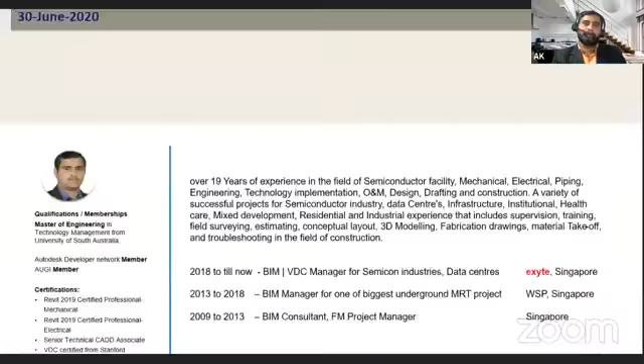As Mr. Deepak mentioned, this is about me. In total, about 20 years of experience in different industries, more than 10 to 15 years in technology development and implementation, developing engineers, developing people, and mentoring. Currently, I'm working as a digitalization contributor plus BIM, VDC, and integrated digital delivery manager for Exyte Singapore.

I will straight away jump into the topic. Today I would like to cover topics like introduction to semiconductors, introduction to fab facility and what a clean room is, and introduction to utilities and base services. I'm dividing this fab facility into two areas: one is base services, another is called hookup services. Then how the wafer is manufactured, then chip manufacturing, then we talk about high-tech fab and the technologies used in it. Finally, we will have a Q&A session. This is the overall list of topics we'll cover today.

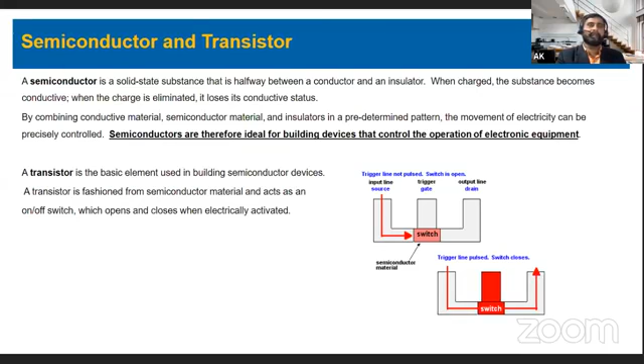In 1904, the two-electrode vacuum tube is invented. How big was this two-electrode vacuum tube? Actually, John Ambrose Fleming used the Edison effect to invent that two-electrode vacuum tube rectifier. It played a major role later in electrical design.

Here's an interesting aspect. The world's first general purpose computer, ENIAC, was announced in 1946. There's some interesting history about this. This computer weighed 30 tons, occupied a 160 square meter room, and used more than around 18,000 vacuum tubes. But these vacuum tubes always had problems; every 2 or 3 days, they had to be changed.

In contrast, today tens of millions of transistors fit smaller than the palm of our hand. We all carry mobile phones and a lot of electronic devices. Because of the IC's introduction, a lot of evolution happened in the semiconductor field. This picture here is that ENIAC computer, just for an introduction.

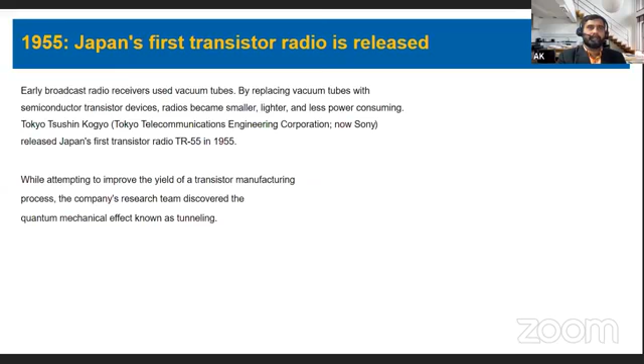I just ran through that history. The Kilby patent refers to the patent of the basic concept of the integrated circuit. It was first developed by TI, Texas Instruments, in 1959. I can put more history on that, but this is just an introduction about how semiconductors started and evolved to now.

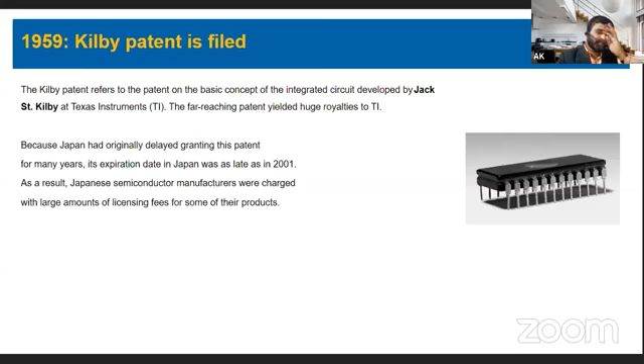So, Moore's Law - I'm putting this here. This is from the person who later became a co-founder of Intel. He predicted that the integration rate of LSIs, which I explained earlier, would double every 18 months, implying it becomes 1,000-fold denser in 15 years. What he predicted came to reality, almost exactly what he predicted. So the number of transistors on the same chip would double approximately every 2 years, which is happening at the moment.

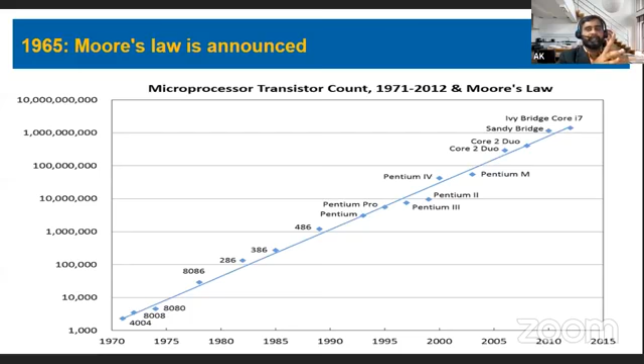Okay, I'll give an introduction to FAB. Today our main topic is about high-tech FAB. In the microelectronics industry, the semiconductor FAB is called something - FAB means something needs to be fabricated. Here, the FAB, commonly called a FAB - what is fabricated? IC is fabricated there, integrated circuits are manufactured. So that's why we call it a semicon FAB.

I put an image here in the next slide. You can see this is something like a typical FAB looks like. You can see the makeup air unit at the basement level, then the clean sub fab, and supply plenum. So this is something like a typical FAB looks like.

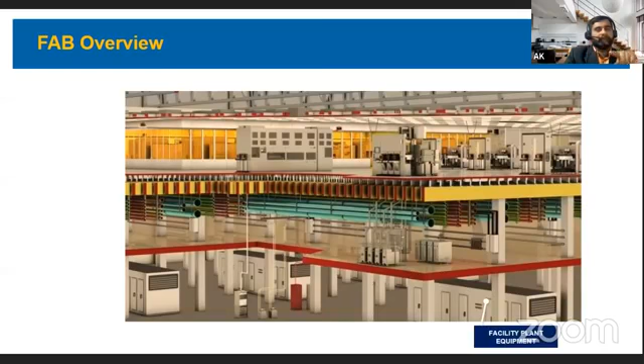Let me put another overview and explain how this FAB looks. At this basement level, or utility level - different projects call it different level names - you can see facility plant equipment will be placed there. Electrical distribution will be at that clean sub fab. Then this is the sub fab level 2.

Then tool supporting equipment - the tool supporting equipment will not be placed in the clean room, but main tools will be placed in clean rooms. I will later cover what clean room means and all that information.

Then this is called the hookup services. In the beginning of the presentation, I mentioned two things: one is called the base services, another one is hookup services. This is the hookup services - later I will cover that portion in detail.

Then this is called laterals. Laterals help connect utility services to the main tool - I will go into detail later on. Then the tools, the main tools - this is not just one tool, it may be hundreds of tools in that clean room area, helpful in preparing or manufacturing the IC chips. Then clean room and fab, you can see it here.

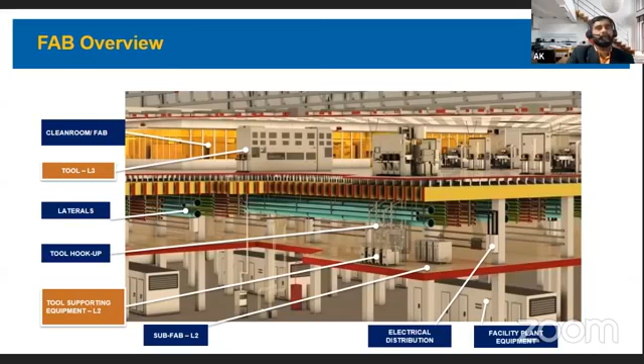Okay, just to give an idea here about the typical fab wafer fab facility, how it looks, and what are the things needed for this wafer fab facility.

For those processes, it needs to have a lot of gas storages, solvents, chemicals, DI waters. We also need to maintain the area and environment properly.

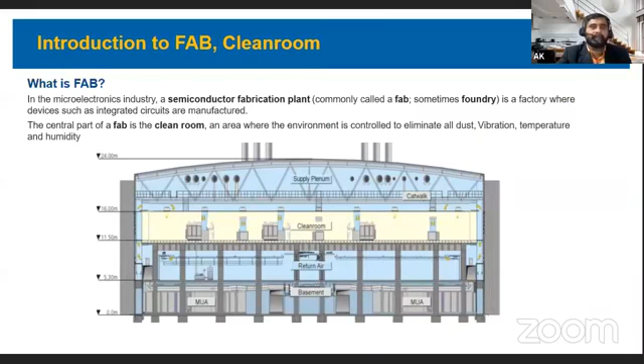In that previous slide, you see here something called clean room. This is the clean room area. This is the key element, the central part of the fab is a clean room. So we are going to discuss about that clean room here.

So what will that clean room do? The central part of a fab is a clean room, an area where the environment is actually controlled to eliminate all dust particles which are less than 25 microns in size. It has to be controlled. Dust is equal to 25 micron size, but some of those small speck particles may be lesser than that, 0.5 micron in size. So it has to be controlled.

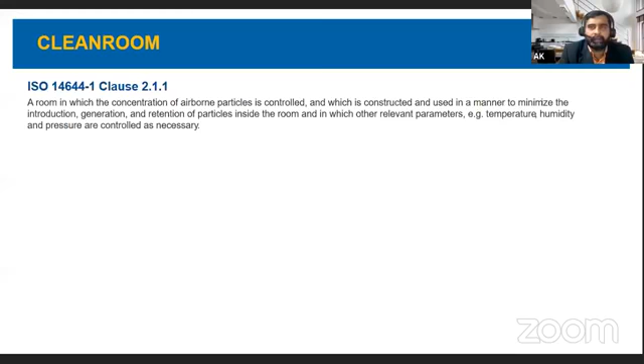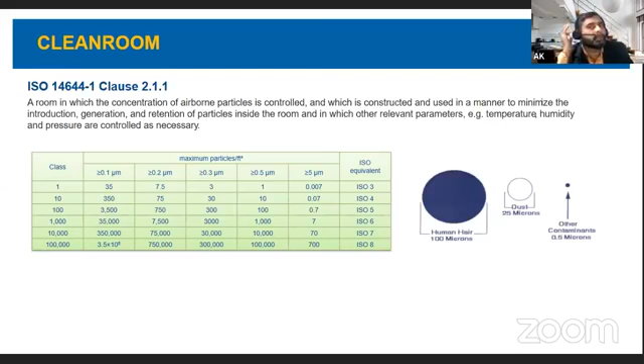Dust is equal to 25 microns. Other contaminants are 0.5 microns. I'll give a small explanation below. Semiconductor memory chips are manufactured in clean room environments because the circuitry is so small, even tiny bits of dust can damage it. You can see that scenario below.

In a class 1 clean room, there's no more than one particle of dust in a cubic foot of air. The 0.5 micron in size is that one dust particle only in that class 1 clean room. So some of the clients have clean rooms of class 1 and class 10. But for comparison, a clean modern hospital has about 10,000 dust particles per cubic foot. Now you can actually imagine how clean a clean room is.

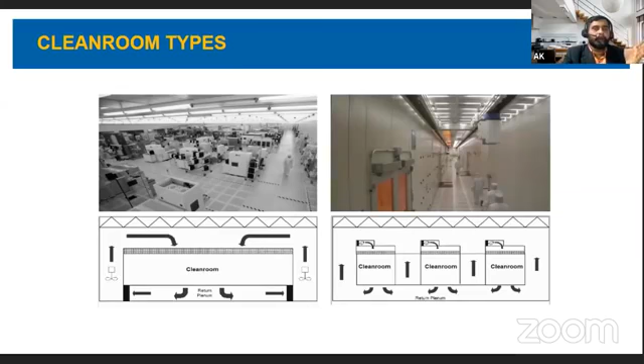There are different types of clean rooms. If you see on the left side, which is called ballroom layout, this is a continuous clean room - there's no partition or any bay in between. But if you refer to the next one, which is a bay chase layout, this clean room has a bay chase here. There are different types of clean rooms out there.

And go underneath this raised floor. You see that next one, which is called raised floor. I will cover what that raised floor is and all its functions in a next slide. Then one more item which is called waffle slab - if you see in that ballroom fab, this is called raised floor and waffle slab here.

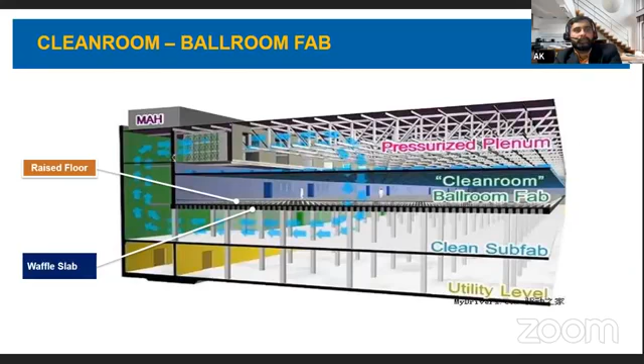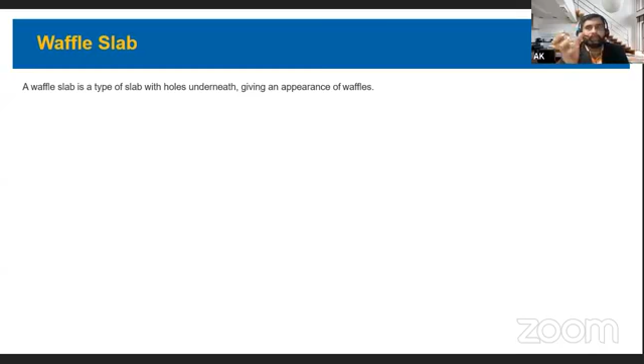What does that waffle slab mean? A waffle slab is a type of slab with holes underneath, giving an appearance of waffles. It is usually used in places where large space is required to avoid many columns. In case we need more columns to be in that place, we will use waffle slab to avoid that.

It actually avoids many columns interfering with the space. It has good vibration control capacity and load carrying capacity as well. You can see this is a typical waffle slab here.

Another item, going back to the previous slide, in that waffle slab there is a hole, circular hole. Some of the slabs may be square, some may be having a circular hole. If you see the next slide, there are call pop outs, just below that raised floor. These pop outs help route the services from the level below, sub fab, clean sub fab, to fab level. All the services will come through this one.

I will show you in the next slide so you will understand. This is the services coming through, and it will be locked, and there is a cover for that. So any services to reach the clean room area or clean room tool has to go through this pop out. There is no other way or external entry into that clean room, so it has to go through this pop out area.

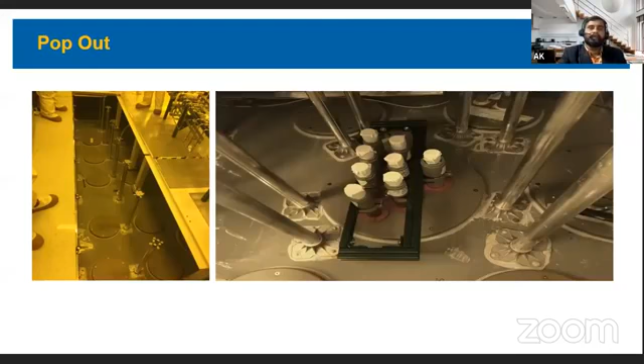Okay, next I will come back to this raised floor. What is that raised floor meaning? There is a space between the raised floor and the concrete slab on grade. Why do they need this raised floor? Because they have to control the environment with correct pressure, temperature, humidity, and all that information.

What they will do is use that return air duct. They will use that space between the raised floor and the floor slab as a return air duct, and also use that space for the routing of wiring, cable, and piping. Also, perforated panels provide a way to achieve flow conditions like airflow, particulate contamination, and vibrations. It actually helps them use that space for that purpose.

There are also different types of panels used for these raised floors, which may vary according to the application. Some of the materials are aluminum, fabricated steel, aluminum casting, wood core, gypsum, and cement. These are some of the raised floor materials they use here.

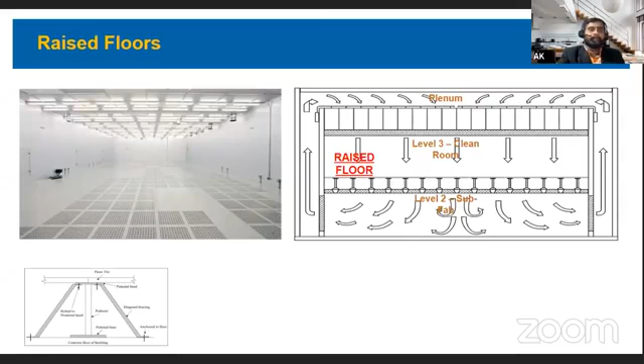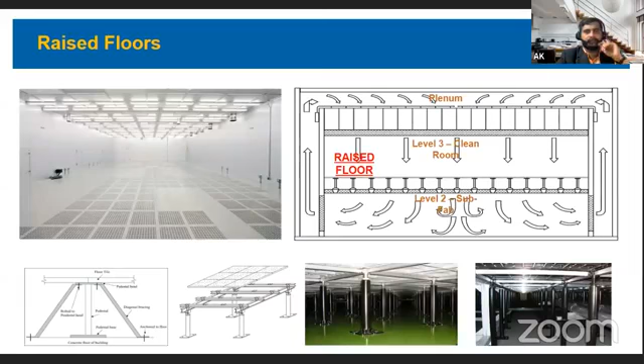If you see this pedestal here, this is the 3D view showing how this looks. These are the tiles, or we can call it the raised floor by partition. This is the view taken from the bottom. Underneath that raised floor you can see all the pedestals, and there are floors arranged here. So all the services will go underneath here. I will show this in the next slide to give you an idea.

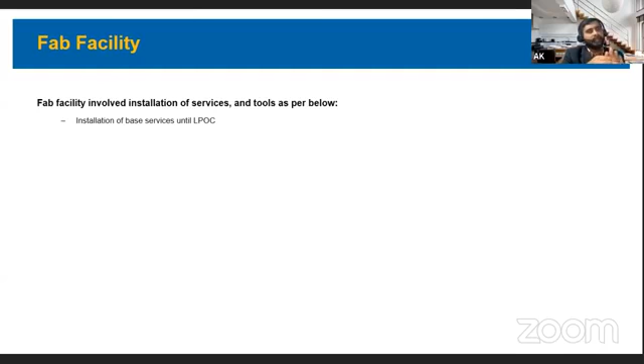Before that, I would like to tell you that in the fab I divide into 4 things here. In the fab facility, installation of base services until LPOC - that term may be different for you. LPOC means lateral point of connection; I will explain what that is. Then these are the services involved: archi and structure, which is actually the infrastructure, or envelope for the facility, archi and structure.

Architectural involves facades, doors, windows, and all those things. CSA is columns, beams, and all that stuff. HVAC is for ventilation and air conditioning systems, exhaust systems, bulk gases and chemicals. These are the things needed for tool operations. For the tools, it has to go through quite a number of processes, it has to go through - you can see it here.

And then the next one, if you refer here, is installation of hookup services between LPOC and TPOC. So these are the processes, and these are the tools it may have.

It has to install there, and I'll run through this tool installation in the clean room. It covers installation of tools and AMHS, which is the automated material handling system. I will go through all the videos in a while, running through a bit quicker, then chip production. So I'm focusing on all of these areas here, then come back to what I mentioned in the previous slide.

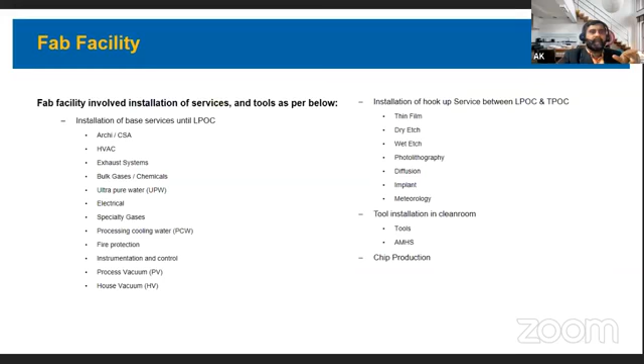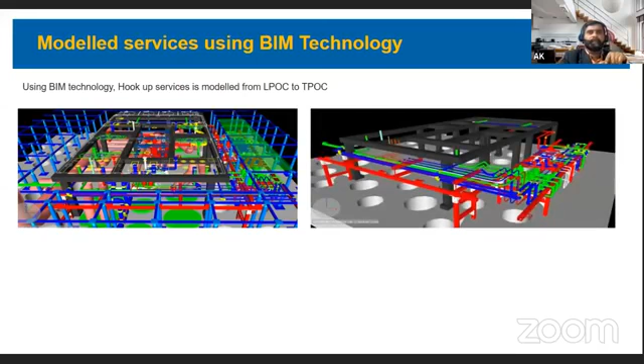All the services are connected from LPOC, then connect back here, which is above the waffle slab but inside the raised floor area. You can see here, this is the waffle slab, the pop out, the service comes up - you can see that information here. So this is called TPOC. In the previous slide I mentioned about LPOC, and this is TPOC, meaning it has to connect to the clean room tools.

Okay, then I talk about AMHS - what is this AMHS? Why do we need this automated material handling system? You can see here, wafers are moved between different tools and processes. There are quite a number of tools in the clean room, not only one tool - maybe wet etching, dry etching. There are quite a number of processes it has to go through. So what AMHS will do is move wafers between different tools and processes using the automated material handling system, called AMHS. Each wafer may be moved through 1000 processes - it may go through a different process, some maybe 800, 900 process, some 1000 process or more.

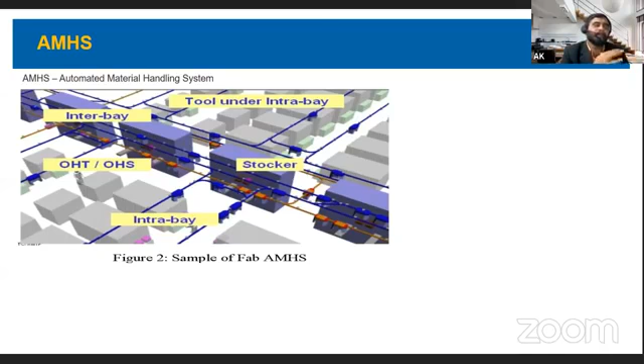It takes more than one month to make a memory chip, so it has to go through a lot of process. You can see here, this is the material handling system - it will run through this, go and reach the different parts. You can see here, this is the path, the AMHS, it will run here in this path.

Then the next one - I told you this thing is called FOUP, front opening unified pod. It is a specialized plastic enclosure designed to hold silicon wafers, because it needs to carry them in a controlled environment between different machines for processing various processes. So it will carry the wafers - it will travel around and go to that specific machine, drop down here, they will use this to do some process, and after that it will go up. It will actually go through different machines and different processes.

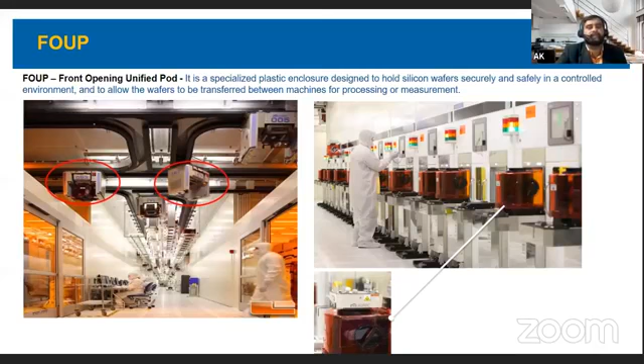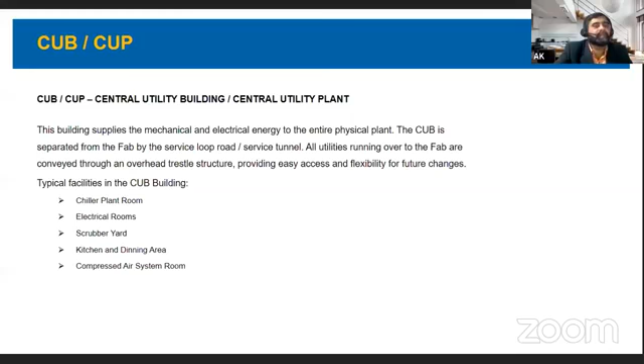Then another thing called central utility building, which supplies - because any plant, if you want to operate, needs mechanical and electrical energy for the entire plant. So that mechanical and electrical energy is supplied from the CUB building. The CUB is separated from the fab by a service loop road, and the typical facilities will be the chiller plant room, electric rooms, scrubber yard, and so much - it will be covered in that. So this will be a separate building. You can see here, fab is separated by the service road or service tunnel - it has to go through this. It's a separate building.

Then I will give an idea about here. Now we have gone through what is the fab, what other things need to be inside - that just gives an introduction of the fab. Now I will show you an overview of wafer and chip manufacturing processes - how the wafer is manufactured, what is the material, and so on. I'll give an idea here.

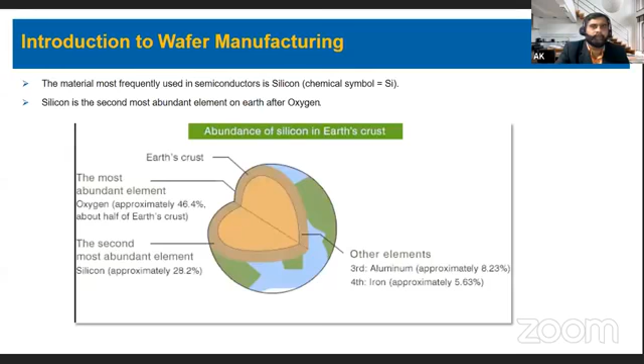There are some ways we can get this silicon - it is found in a lot of things on earth. I can see here rocks, natural water, plants, trees, bodies of animals, and so on, many items. Silicon used in semiconductors such as integrated circuits requires very ultra high purity, equivalent to 11 nines - 99.999999999, which is very high purity, and is refined using various processes after extraction. Later in a moment I will share with you, I will show you some videos.

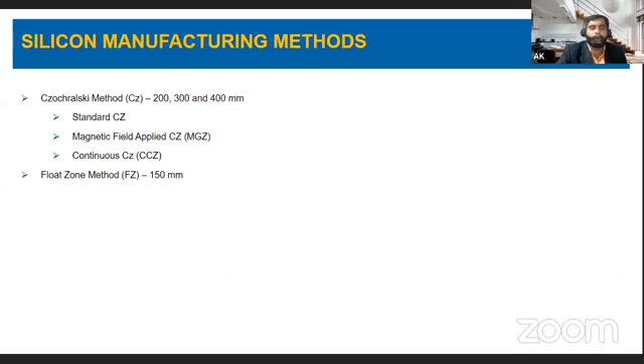While the largest silicon ingots produced today are 400 in diameter, the most common in the market are 200 and 300 diameter crystals for standard industrial processes.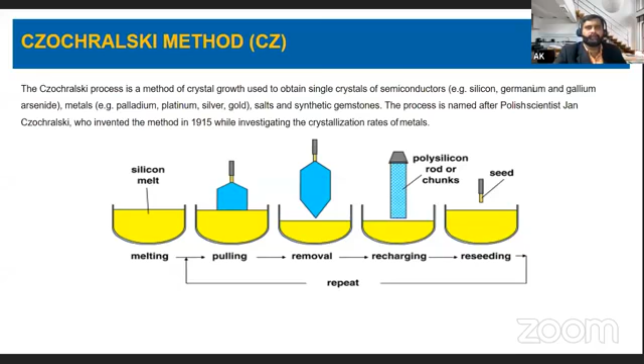What is this Czochralski process? I've given information here. Any silicon melt can be put in, and we collect all that silicon here as raw material, which will be used with this seed to pull it here. This process repeats again and again. I'll show you in the next slide for a better understanding.

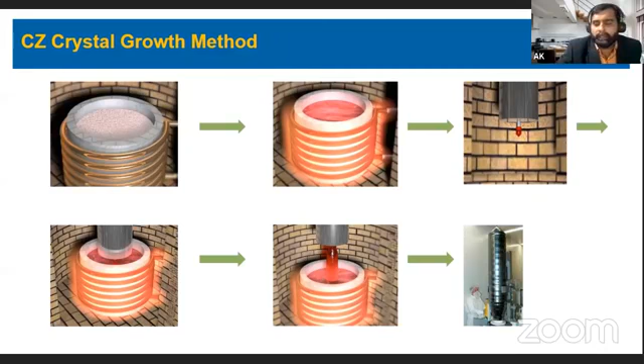Let me share a video here, the next one. Just have a look at that video.

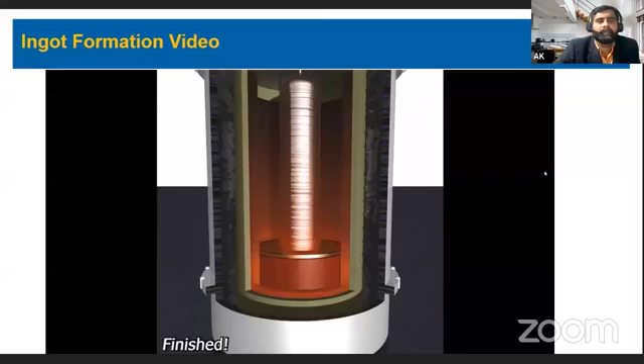Now you can see that end product here, it's finished. Then I will run through that process here. After the ingot is produced, what processes does it have to go through?

You will see here processes like peripheral grinding. Once we have that ingot, we have to grind it to the specific diameter. The ingot is cut into blocks having the specified length, and after that, you have to do the peripheral grinding.

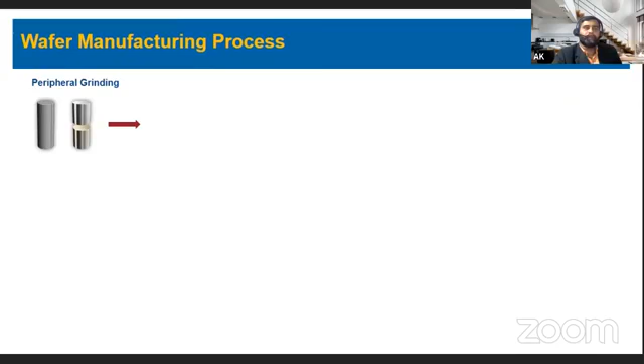It has to go through the slicing process for this. Then we go through processes like beveling and lapping. Lapping is something like wafers being set in a carrier, which spins between two rotating lapping plates.

Both surfaces of the wafers are lapped to remove damaged surface layers and all that. This is done in the lapping process, then etching process, which is chemical polishing, followed by heat treatment. In that heat treatment, heat is applied to eliminate thermal donors in order

to restore the originally intended specific resistance. There is some process happening during this heat treatment. Just giving an overview of what these processes are.

Then polishing - we have to do the polishing here, mounted on a ceramic plate, pressed against the surface of a rotating plate covered with a polishing cloth. Then we do that polishing here.

Then after that, cleaning has to be done. Wafers are physically and chemically cleaned using ultra pure water and chemicals. And also we will do some inspections here - inspections like wafer flatness and surface cleanliness will be checked, the key factors of the substrate.

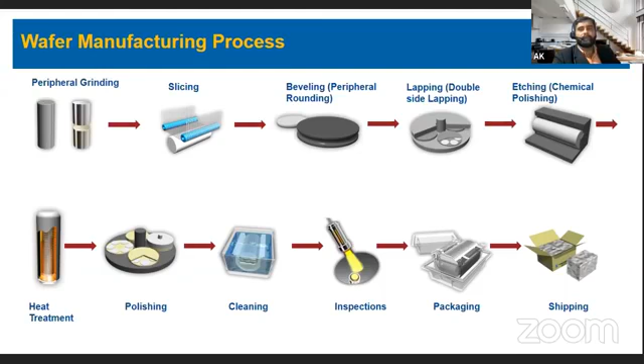right? After that, let me show another short video about the process which I just showed.

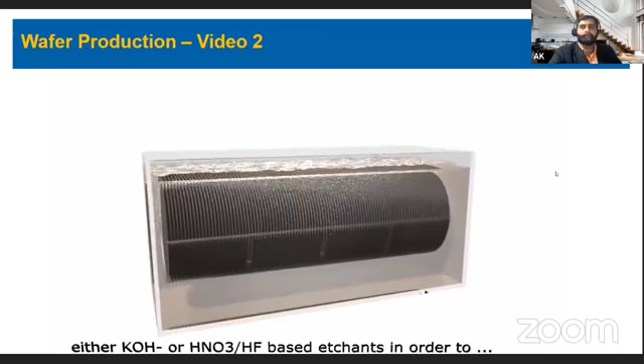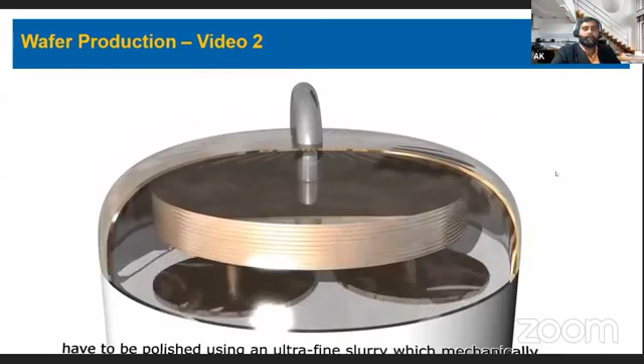So finally, we use this polishing here with the help of this tool here. Then once this operation is done, it goes for testing, then followed by packaging and shipping.

The wafer has been done. How will that wafer be transferred to a chip? That will be under this chip manufacturing process here.

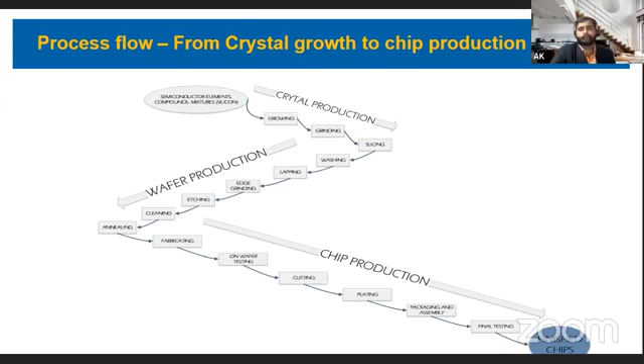Okay, the next slide. What we are going to do is take these annealed wafers. We have to go through processes like layering, epitaxy, oxidation, and so on. There are some processes it has to go through.

See here, if you've gone through this epitaxy, oxidation. Epitaxy is something like a single crystal film of a semiconducting material applied by chemical vapor deposition or some other process. Metallization is another one. This is called the layering method, followed by epitaxy.

I'll just give some information about these processes here. What is epitaxy and oxidation? Since time is running out, I'll just go through these processes quickly.

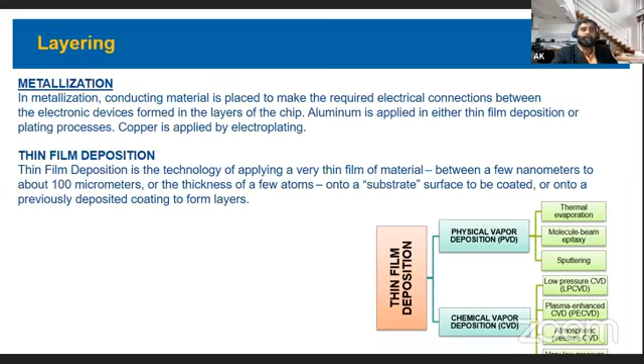Metallization, a thin film deposition. You can see that there's a layer by layer. Next step is called planarization. After each layering step is done, a chemical mechanical polishing step, CMP, smooths the surface of the wafer.

Then the next one is coating with photoresist. I'm just going through the steps in developing the chip manufacturing process. For photolithography coating techniques, there are different types: spin coating, spray coating, dip coating, and roller coating, and so on.

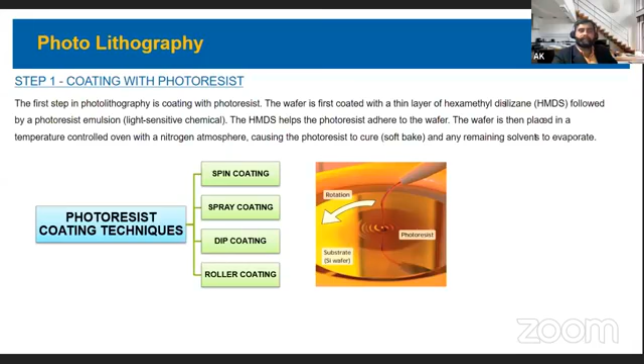This is the first step, coating with photoresist. Later, after this slide, I will share some video. This is for coating with photoresist.

Then the next process is masking. Masking is a pattern sheet that shields a semiconductor material during wafer exposure. This is one of the processes in photolithography.

I don't have much time to go through all these things. You see here, this schematic diagram shows how this is transferred into a 3D layout of components in a chip, using the masking technology.

Using this mask design, it will divide the structure into horizontal layers, capturing the design of each 2D layer in the photo mask. These are the steps and processes that happen during this step number 2.

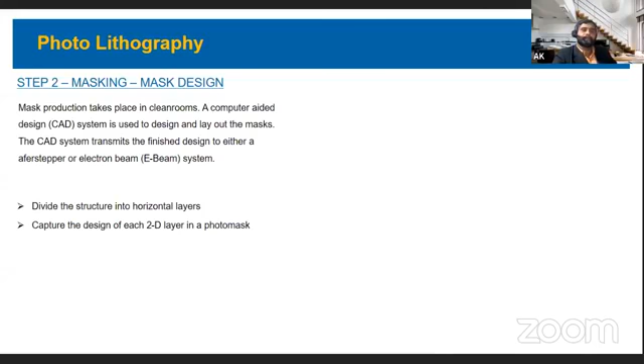Then the exposing technique, this is one of the processes. Exposing is something like the wafer is exposed to ultraviolet light, which changes the solubility of the photoresist in the unmasked areas. That is the main purpose of this process. Some exposing techniques are contact aligner, proximity aligner, and projection aligner.

You can use that. Then the next step is called the developing process. Developing is something like the photoresist coated wafer has been exposed to light, and it is immersed in a solution called developer.

So that is step number 4. It is actually formulated, so that's why we do this process, to be removed. Maybe some of the acidic areas that are exposed will be dissolved in that developer. That is the reason we go through this process.

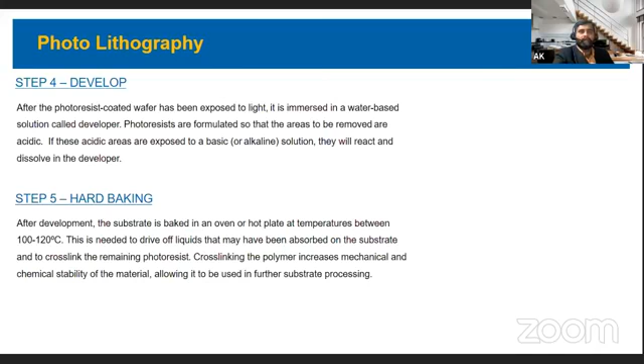If you go through this, etching, stripping photoresist, and cleaning process. Some of the stripping photoresist methods here are chemical stripping and plasma etching. These are the processes it has to go through. Each and every chip has to go through all these processes.

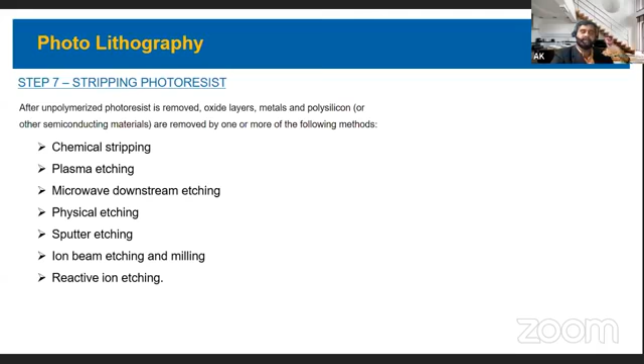You remember that's the reason I mentioned in this automated material handling system, each wafer has gone through more than thousands of processes, and it has gone through different machines. So there are a lot of processes it has to be done. So this is the patterning, layering, patterning.

This next one is called doping. You will see that doping, which is thermal diffusion or ion implantation. This thermal diffusion can be done with wafers placed in a quartz tube, then the gas will flow through these wafers. This is for the thermal diffusion process.

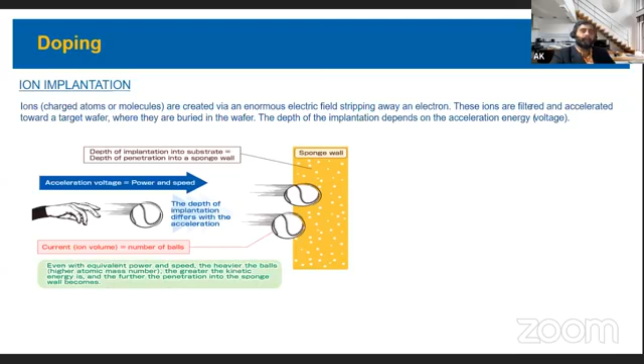Then ion implantation, so later I will show one video to cover this entire flow. So this process will be repeated again and again to make sure the final product is obtained, until the final product is achieved, the process will be repeated.

Passivation will be done after the wafers have completed all the layerings. It has quite a number of layerings to be done. As I mentioned, all the processes in chip production need to be repeated, completing all the layering, patterning, and doping cycles until the chip circuitry is complete.

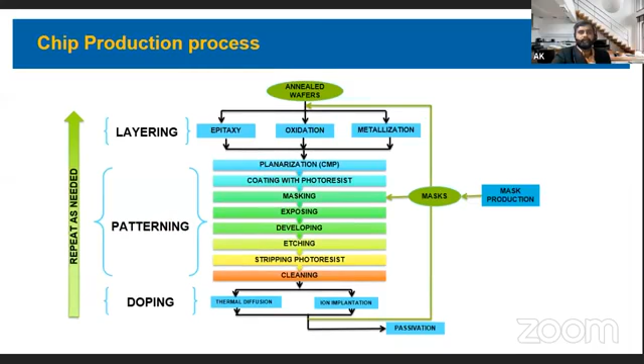Once the chip circuitry is complete, passivation is a CVD type process that coats the wafer surface with an oxide layer. They will coat an oxide layer on top of the wafer surface. Then finally, you get the on-wafer chips ready for testing.

Now it will go for wafer test and backend processing. If you see this, we have gone through these steps, and you can see how it is built up. As I mentioned, there are repeated processes to build up one small chip wafer surface. How many layers are built here? You see the silicon transistor layer, multi-layer wiring layers, and so on. This is the wiring layer, then multi-layer wiring layers, reaching up to this.

Once it's done, the next process will be dicing, packaging, and so on. Then this will be the end product.

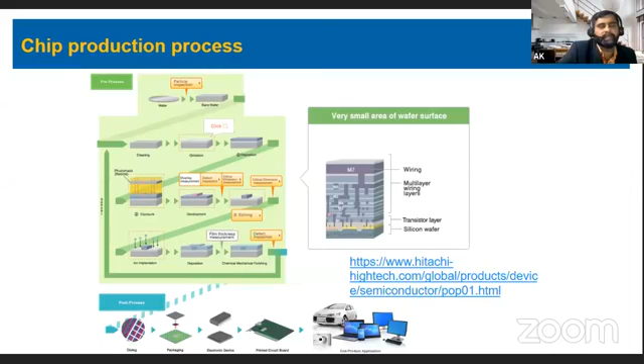In this link, there is one animation. I don't have time to run through that animation, but if there's time, let me see if I can.

You can see my screen here, that animation screen. Mr. Deepak, can you see my screen, this animation screen? Yeah, screen is visible, but okay. I think it's okay if we skip the animation and proceed. No worries. Okay, then I think the time is running out, we will go through the next one.

Okay, the chip production video. This is a short video here.

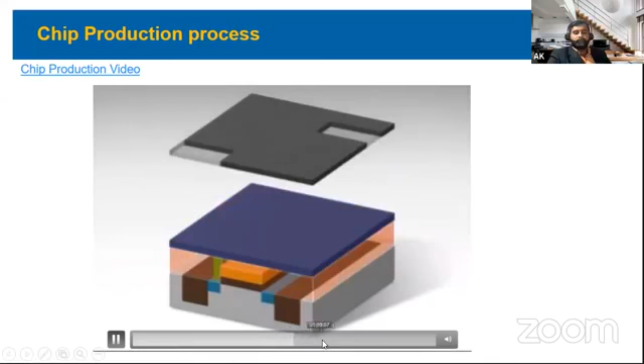Then finally, if you do the probing and so on, the final product will be something like this. Okay, I will skip this.

Then I just come back to this high-tech fab. I divide it into sections, I'll just run through quickly. So what is that high-tech fab? It digitizes all the workflows in producing this virtual digital model of the buildings and facility systems, plus hookup services, plus digitized workflow in the chip production process.

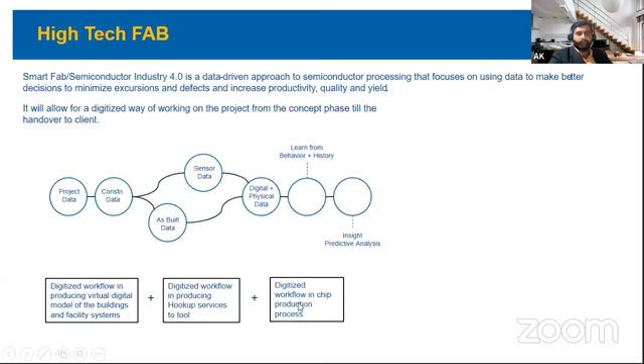So I just give an introduction about what BIM technology is. BIM is about building information modeling. If you want to develop your facility, you need this technology so that every stakeholder can talk to each other. If the model is developed by architects, it can be transferred to the structural engineers, civil engineers, or MEP system engineers. Then finally, the model information can be transferred to the builders for construction and to the owners for maintenance purpose, so that through the entire project life cycle, the information will be evolved.

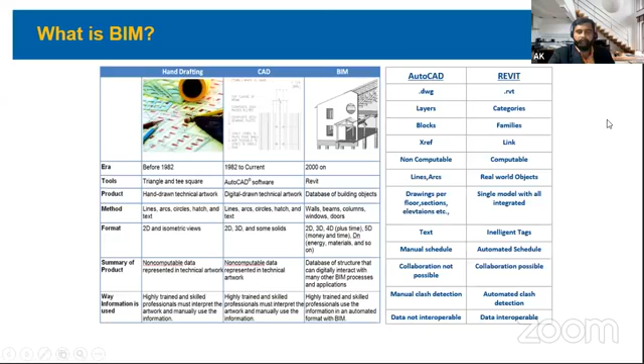This just gives an idea about what BIM is and what software is used. Currently you are using AutoCAD, which is called the 2D environment. If you add the Z-axis or space, dealing with spaces, then it becomes 3D. If you add time to the space, it becomes 4D. Add cost, and it becomes 5D. Add sustainability and energy analysis, and it becomes 6D. Add operations and asset management, and it becomes 7D, and so on.

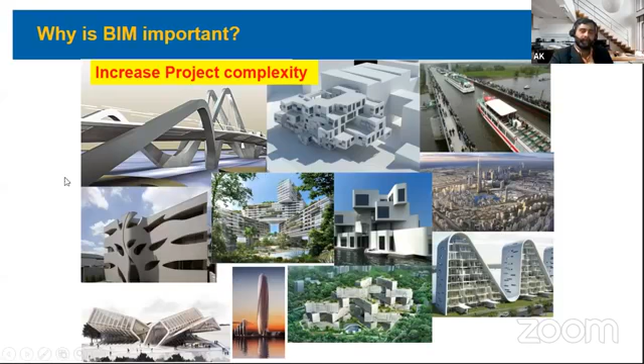So why is BIM important? The reason is that contract deliverables are changed by government bodies, and in some areas it will be mandatory. Another reason is that projects are so complex. You see in the picture these complex buildings. If you want to build them, you can't just do normal traditional drafting, so we need technology-based software to do this, to cater to increased project complexity and achieve the timeline. Building information modeling helps reduce errors, and the main thing is collaboration, which can be done seamlessly across all stakeholders.

Then how does BIM work? I'll just run through a few useful items. The traditional way, by manual drafting or whatever, follows a traditional workflow. When it comes to BIM, this is a model-centric workflow, where from that 3D or digital model, all the information can be extracted.

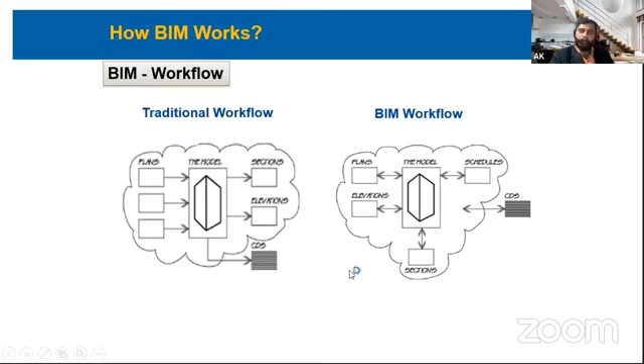There's a BIM function called interoperability. For example, if I'm using software A and another party is using software B, these two software have to talk to each other. If they don't, there will not be any information sharing. That's the concept of interoperability, and it solves this problem.

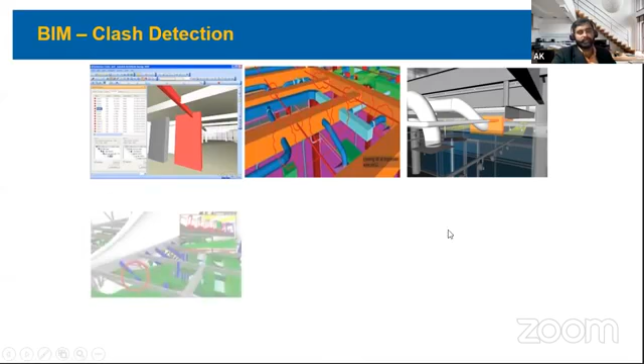Then there's clash detection. If you're doing construction-related work, you need to install a clash-free design. For example, for our fab, if I want to install the services, it should not clash with other services. It should be detected in advance. BIM has the technology to detect these things, identify costly clashes, and it also helps reduce RFIs, which are requests for information. It helps in that coordination area. So if I use BIM, I have clear coordination and my installation will be perfect.

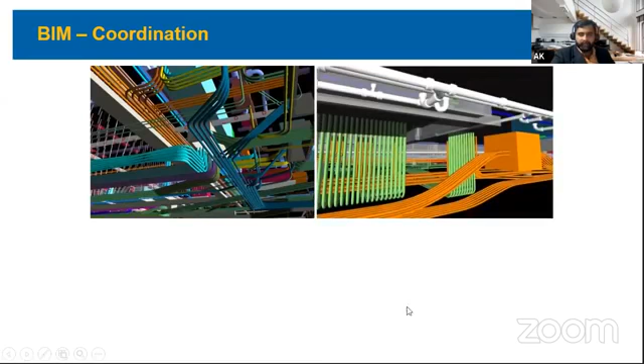Then on top of that coordination, once it's done, you can see here a clash-free model can be developed using BIM technology.

Then virtual reality, as I mentioned, is the most widely known of these technologies. It is fully immersive—you can feel like you're in another world, apart from the real world, using a head mounted display. You can put an HMD on your head and feel that. You can do design reviews—for example, if you are doing models, you can do a design review with multiple parties just with that head mounted display, or headset.

You can actually experience a real computer generated world. It brings you into it, like using apps like Pokemon or others in mobile apps—that's an example as well.

Then there's another one called mixed reality. Mixed reality brings together real world and digital elements. You can see real world objects inside—we have implemented this function recently. You can just stand in a room and see those objects. So it links up the real world and digital objects.

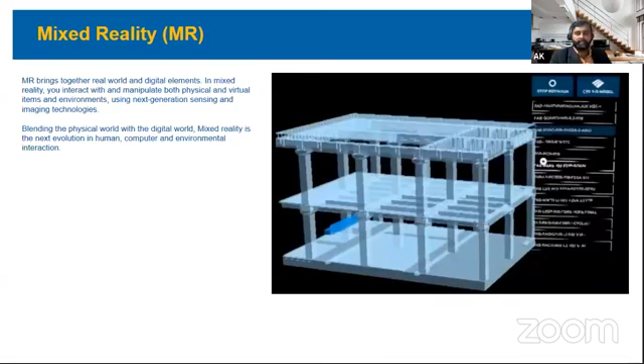Using mixed reality. Then scan to BIM is another function. If I use a scanner to scan a particular facility, it tells me what is installed or built. I can compare this with my model—the digital model may be different, maybe the contractor didn't follow it. This can be easily tracked using scan to BIM.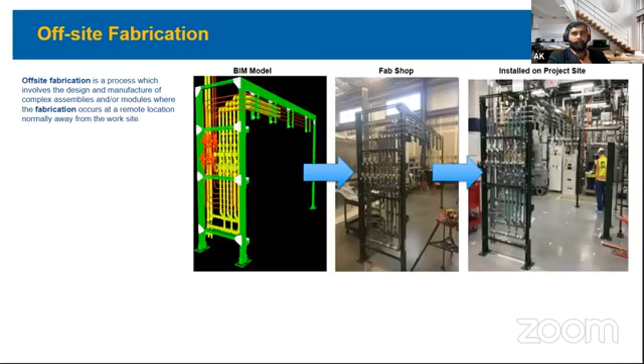Then offsite fabrication. Offsite fabrication is a process which involves the design and manufacture of complex items outside the site. It improves space utilization, lowers cost, and is very helpful in that area. You can see here a BIM model, a fabrication shop, and the item installed here—this is called offsite fabrication.

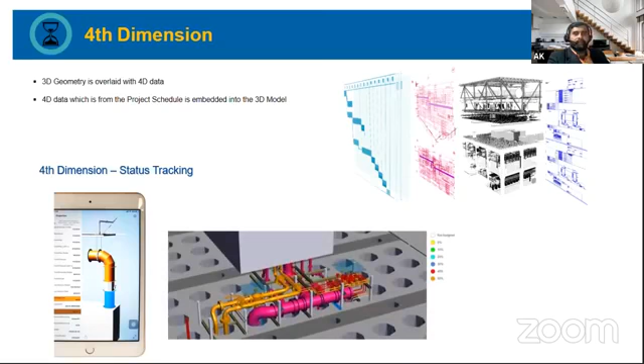Then the fourth dimension, as I mentioned—this is my 2D drawing, starting with 2D, then 3D, then adding a timeline on top of this. Using the fourth dimension, I can do status tracking—this item is installed, how many percent is covered. This kind of information can be covered in the fourth dimension. Also, with 4D, you can have construction sequencing.

I'll quickly run through this. You can see this is my design model. I can track this using project management software like Primavera or Microsoft Project. I can check here how it runs through the schedule—for example, week number 1, what happened, you can see here, week number 4, week number 5—it will be finished in a certain number of weeks. So you see the final object here. This is called digitally rehearsing before it's actually built. This is the construction sequencing for 4D.

Then talk about the fifth dimension—quantities plus cost. From this model, the quantities can be taken and combined with cost data, so we can have the overall cost for the project.

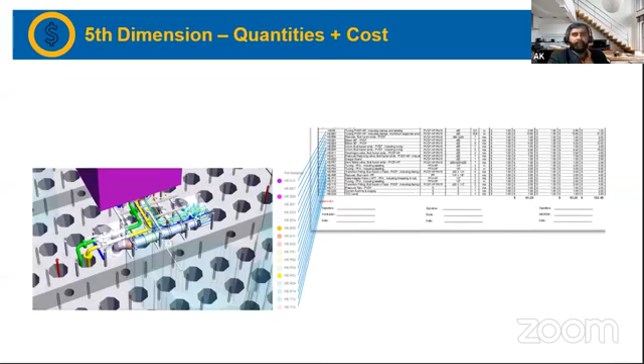We can track the cost by services or by discipline and so on. We can have more features to track this using that fifth dimension, which is the technology of BIM. Then, as I mentioned, BIM can be used for analysis also.

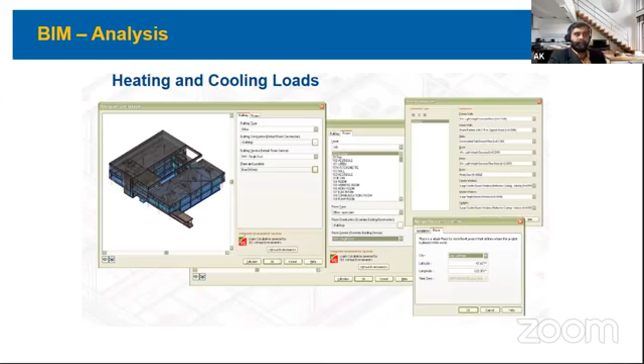As engineers, you may have to do architectural analysis, structural analysis, lighting analysis, mechanical analysis, linked with softwares like Trane TRACE, E20 softwares, Dialux. BIM will export this information to that software, and from your main software to the analysis software, easily you can do the analysis and get the results. So it is very helpful in doing the analysis as well.

Just to show some examples here: internal CFD, shading analysis, dynamic thermal modeling. There are some softwares called IES that are available. You can use one of these softwares to do the analysis.

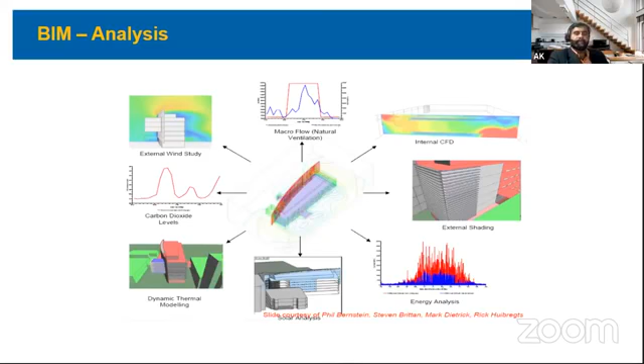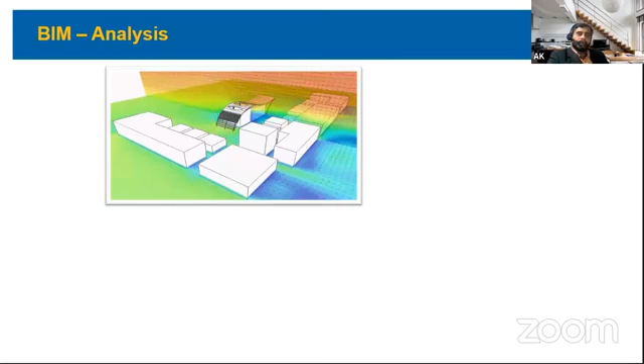And on top of that, there is another analysis you can do here: wind analysis, how the wind flows. So there are different types of analysis as per your requirement that you can do.

I think this concludes my presentation here. I'm open to a Q&A session.